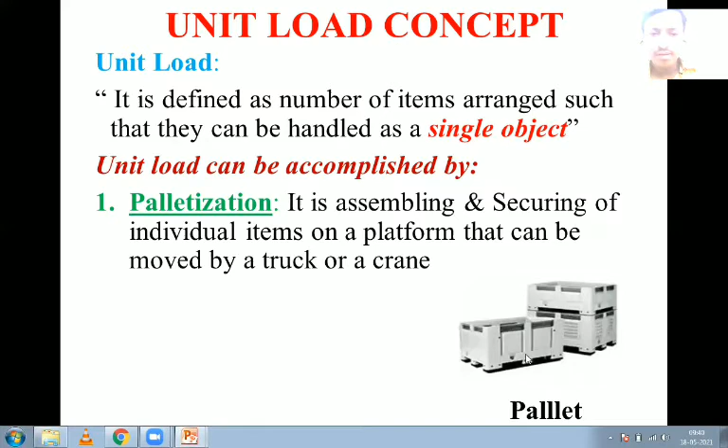Next is unitization. It is also the assembling of goods but as one component, as one compact load. If you want to transfer materials from one place to another where the distance is long - if you are transporting material within industries, in that case you can use the previous method like palletization.

That doesn't take much time, simply placing it and transporting. But when it comes to long distances, in that case you need to cover it properly. Whatever things you are transporting, you need to cover it properly so that there is no environmental effect on those particular objects or goods.

So unlike palletization, additional materials are used for packaging and wrapping of the items as a complete unit. This means it is properly packed before being transported when there are long distances. You can see the example here - normally you can see trucks. Inside this, your goods will be placed and they will be transferred from one place to another.

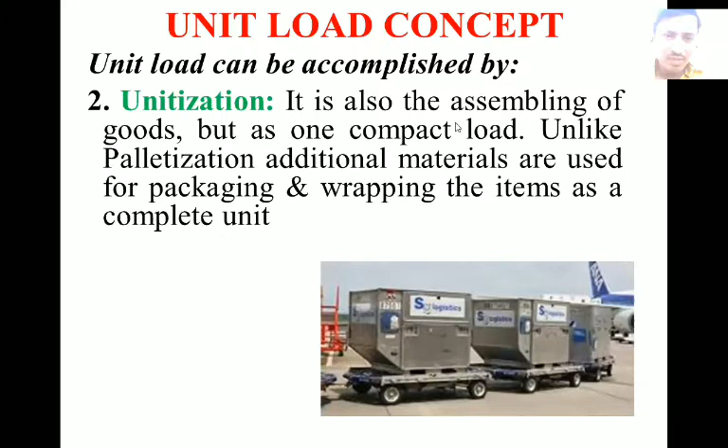Next is containerization. This is also an important concept. As we have seen earlier, containerization means - we already know the meaning of containers. A container is some kind of place where we can place certain things. That is called a container. So here, containerization means it is assembling of items in a box or a bin.

Suppose you want to transport sand from one place to another. In that case, what we do is we normally use trucks. It is an assembling of items in a box or a bin. Normally it is in a bin. It is most suitable for use with conveyors, especially for small items.

Earlier I mentioned, suppose if you want to transport loose materials from one place to another, you require some containers, so that you can transport such kind of materials from one place to another.

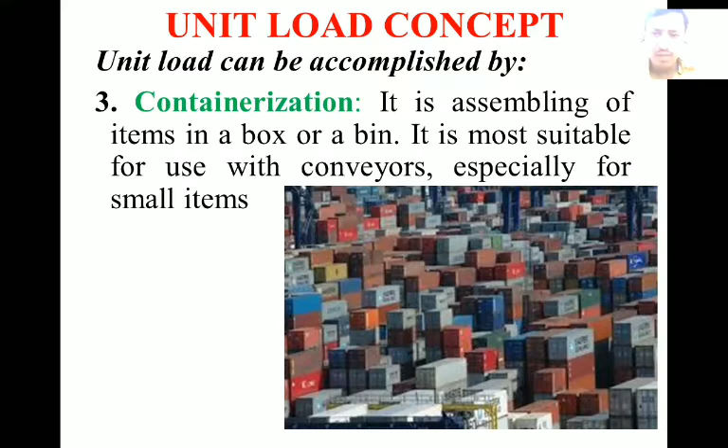So next is principles or guidelines in selecting material handling equipment. In industry or anywhere, if you want to use a material handling system, there are different kinds of material handling systems available in the market. So when you want to select one, you need to understand what kind of application it is, for what purpose it is required, what kind of motions are required, what type of material you need to transport from one place to another, what is the distance, and what are the environmental conditions. You need to keep many things in mind before selecting a material handling system for your application.

First is depending upon the direction of load travel, whether it is vertical or horizontal. If it is vertical, normally we use cranes and elevators. Cranes normally use hooks to place the materials. Elevators are used, for example in construction, where you want to transport material from the ground floor to the top floors, like sand, concrete, etc.

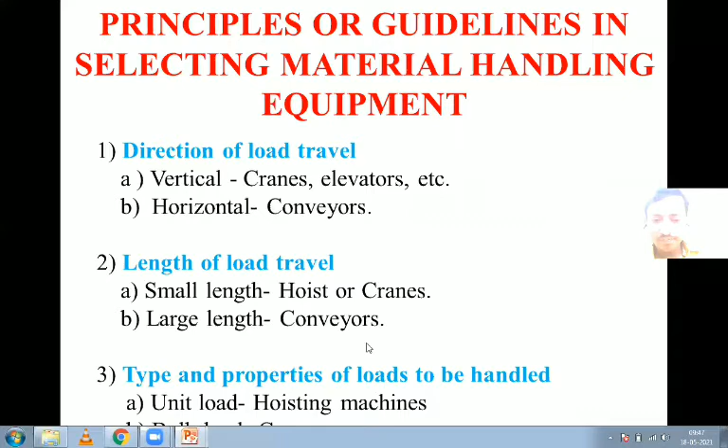There are other points also you need to consider. Capacity required means within a particular time how much material you need to transport - that also you need to keep in mind. Afterwards, type of production process - depending on the industry, what type of production it is - that also you need to keep in mind while selecting the material handling system.

Afterwards, methods of stacking loads at initial and final points. Stacking means loading and unloading - how you are going to place the materials on the material handling system, whether one on top of another or side by side placement. So it means how actually you are going to load and unload the material. Afterwards, the last thing you cannot ignore is cost - initial and operational costs. If you cannot bear the cost, then definitely you cannot use that system. So this is also important.

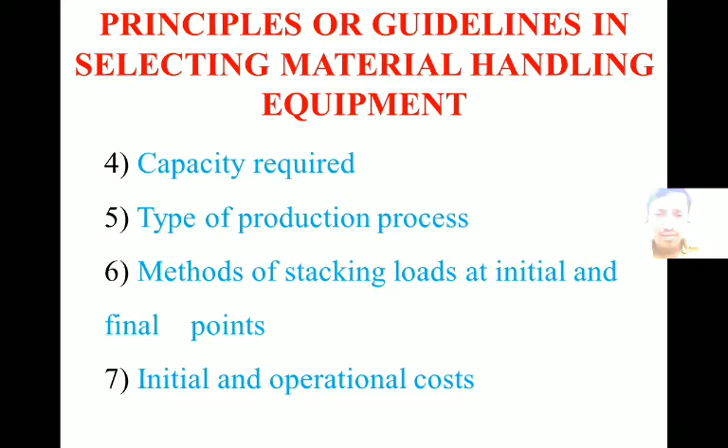So these are the seven important points. There are other points also you need to consider, but these are the important points you need to keep in mind while selecting the material handling system. So these are the principles or guidelines - these are important points you need to keep in mind.

So next is selection of material handling equipments. How are you going to select this? The previous points we discussed need to be kept in mind while selecting, but apart from that, it is important to understand the main important parameters. The first one is properties of material.

Properties of material means what type of material you are going to transport, whether coal, sand, or chemicals, because in chemical industries humans normally cannot go to remote places, so material handling systems are used. Sometimes the material being transported has certain properties, like causing oxidation on the material handling system, so you need to consider the properties of material being transported from one place to another.

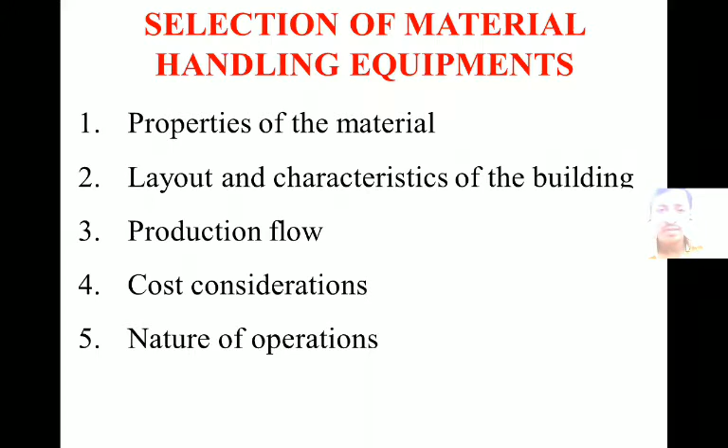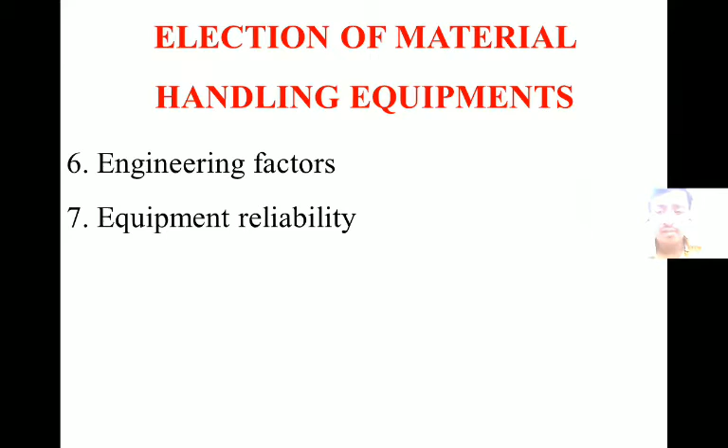Afterwards, next is engineering factors. You also need to keep in mind things like efficiency, other capacities, operating efficiency, load carrying capacity. Next is reliability, meaning how many days, what is the life of that particular equipment, how reliable it is, whether it breaks down frequently or faces problems in between. These are the things you need to keep in mind while selecting material handling equipments.

So what are the main objectives of material handling system? Whenever we say material handling system, it will have certain objectives. Why do we use material handling system? If we are not going to use it, what happens? If we are going to use some system, it should have certain applications and advantages as compared to the existing one. There are a few objectives of material handling system. The first one is to minimize the cost of material handling, which is the foremost important objective.

Next is to minimize delays and interruptions by making available the material at the point of use at the right quantity and right time, which is very important in industries. Otherwise, other machines will stop working if you don't supply the material on time. Next, it will definitely increase the productive capacity of the production facilities by effective utilization of capacity and enhancing the productivity, which will automatically increase the efficiency of the industries.

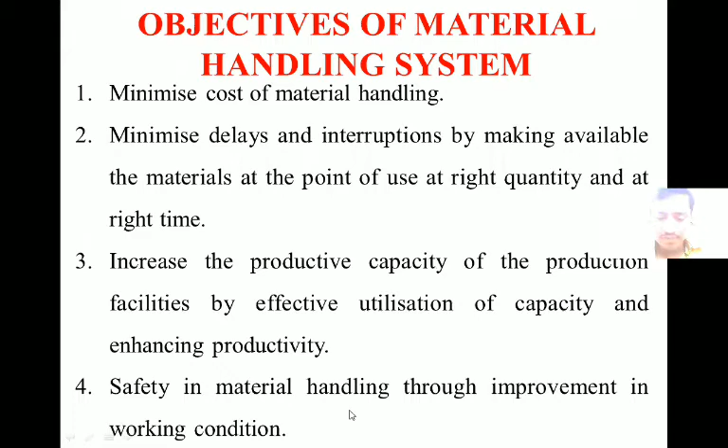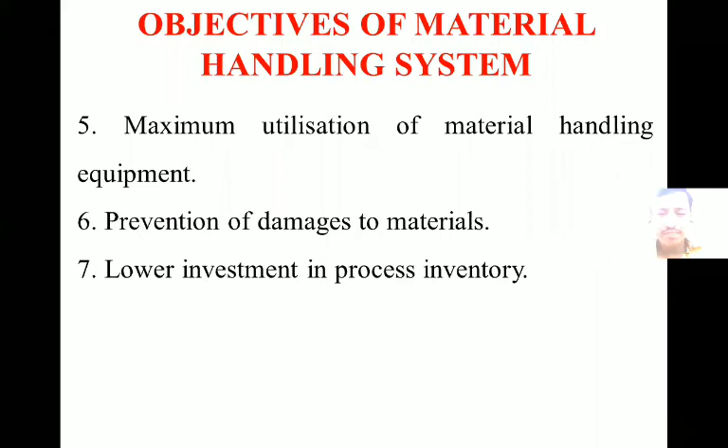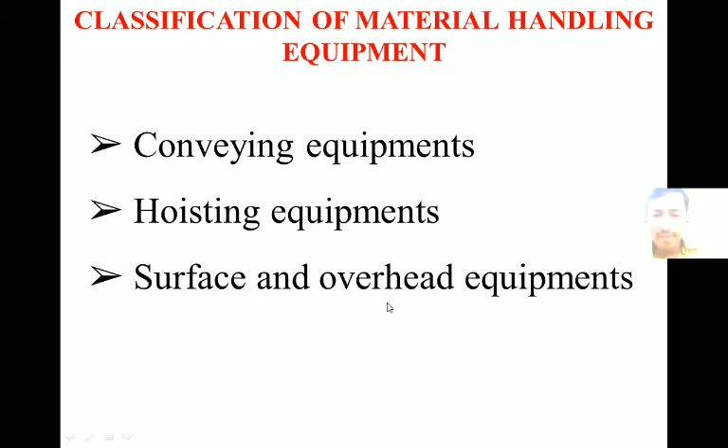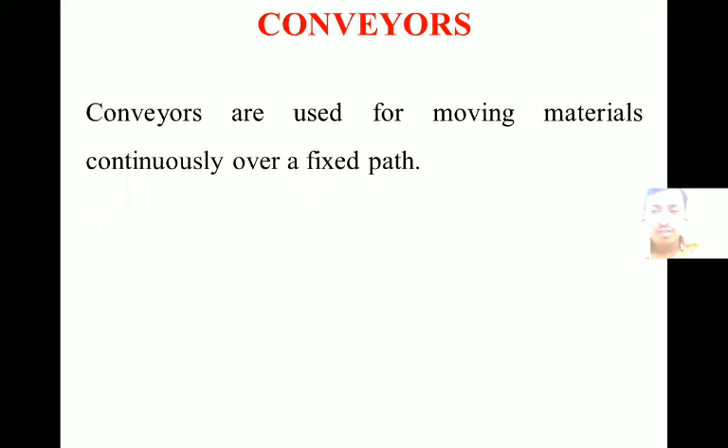Okay, so let us study in detail about the conveyors. What is the meaning of conveyors? Conveyors are used for moving the material continuously over a fixed path. So in industry, what happens? Normally conveyors are placed to transport the materials from one place to another continuously over a fixed path. The path is fixed, the system is fixed, so only through that path the material will be transported.